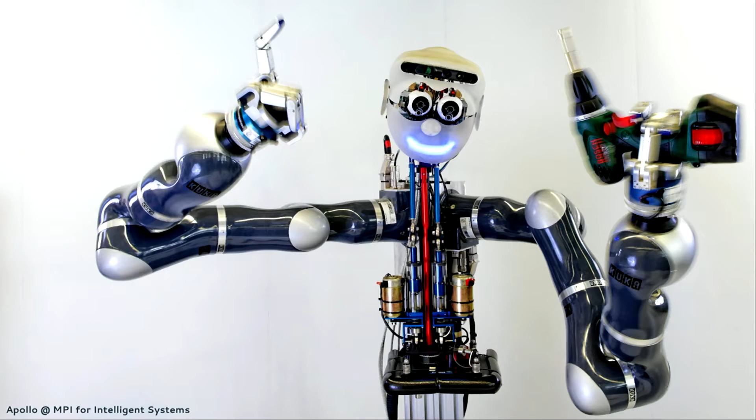And it's really not clear what is in that secret sauce that makes humans so amazing in this. And we really haven't figured out how we will enable robotic manipulation so that robots can be really helpful to people in the future. So I have a few thoughts on maybe how we can achieve this. But today, I want to focus on one particular point, which I already brought up, and that's that we should probably embrace uncertainty. So what do I exactly mean by that?

So one of the places where I typically don't publish is actually in computer vision and machine learning conferences, or very seldomly. I have very few papers on this. And I thought a little bit about that. And I think the reason for this is that in these two fields, very often, success is measured in terms of accuracy. So, for example, in computer vision, this can be in terms of pixels, like segmenting or labeling each pixel in the image, or in a point cloud, or maybe predicting forward in machine learning what is going to happen next, to the absolute maximum possible accuracy.

And that, of course, is a very interesting and challenging problem, and it has its own merits, and should be done. But I would also argue that total accuracy is actually maybe never achievable. Also, this total accuracy is not necessarily what a robot actually needs.

And if you think about this picture, for example, where you see a kid playing with toys, you can imagine this kid basically playing around with these objects, maybe dropping them, maybe they're slipping, maybe it's trying to take one of these things and put them into the tractor or whatever, and it's not going to work, and it's just going to recover from these things. So it's really a very intricate process, but it's probably not about maximizing accuracy, but rather about how to recover from failures and how to try again.

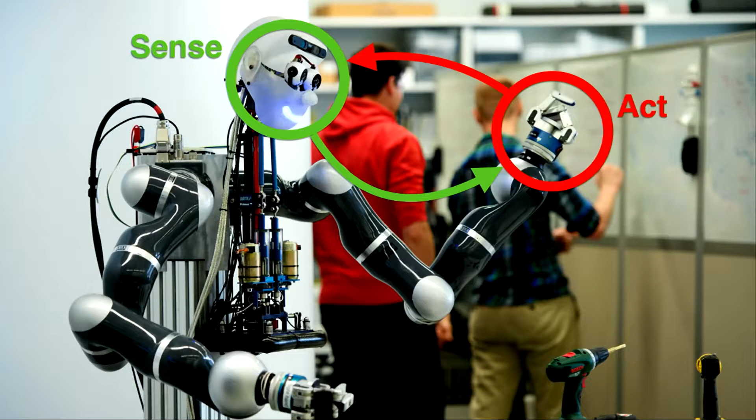So what do we do in robotics, right? I think in robotics what we need to do is to close fast feedback loops around really messy, high-dimensional sensory data, to actually interpret the scene and really make very fast decisions. But I would argue that we need to accept then that we will never achieve total accuracy. And instead, I would argue that let's trade off accuracy with speed and work on methods that are maybe reactive and continuously adapt and can react to failure, instead of trying to plan everything out based on the assumption that you have some perfect perception method or some perfect prediction method.

I do think learning and computer vision and machine learning methods and planning methods should be in there. But I think the focus, the goal should be a bit different. And even if you take that view, there are still challenging questions. So you still have to ask yourself, if I don't need total accuracy, what is actually the important information? And how off can I be to still have a functioning robot?

But just to summarize, one message that I'm trying to convey in this talk is, if you work in robotics, you actually have to say goodbye to perfectionism, as people, for example, in computer vision often strive for, or in terms of prediction. And if you work in robotics, you really have to, I think, accept the fact that everything will be uncertain at a certain base level, and you have to somewhat embrace that chaos of this uncertainty that comes with a robot. Okay, so once you accepted the fact that maybe we will never reduce uncertainty, then I think one good focus is actually on controllers and planners that can continuously adapt.

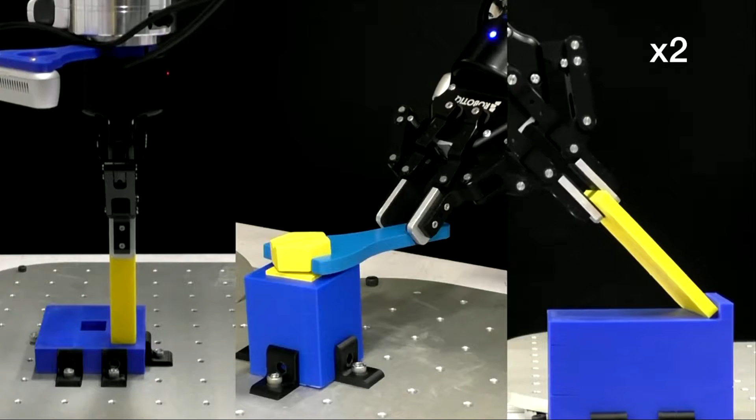For those of you who work with a robot, all of you know that actually autonomously learning robot skills is pretty challenging. So here you have these 3 tasks of peg insertion, turning a wrench, or a shallow depth insertion. So for example, something that people who assemble your phone, or you sometimes when you put the battery into your phone, have to do. So these are pretty difficult tasks.

And the way we want to approach this problem is, instead of trying to develop better perception methods or better controllers, what we're going to try here is to actually scaffold the learning process that this robot has to go through. And the contribution here is that we formulate scaffolding as a 2-loop learning problem. Let me go through that part. So actually, scaffolding is a concept from developmental learning, I believe. I don't know so much about this. I just know it's a concept there.

But you can also think about all the things out there that we as people actually use to help in learning things or building things. So, for example, we use scaffolds to build buildings. To learn certain skills, for example, riding a bike, you can use training wheels. And actually in automation and assembly, fixtures are a very common thing that you use to make assembly easier. But of course, all of these things, like how you place these fixtures, are typically figured out by some smart engineers, right? And a trial and error period.

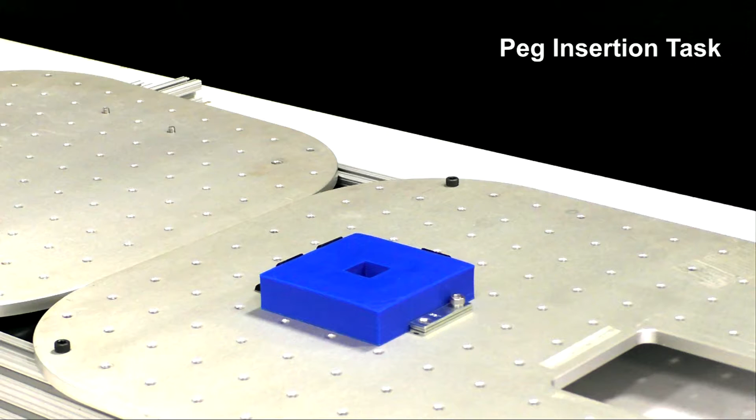So our goal here was really to construct a framework for robots to autonomously discover how to ease manipulation skill learning. And so let's take this peg insertion task as an example, right? It's a difficult problem, especially if you don't know what exactly the geometry is and if you have noisy perception, to smoothly and efficiently insert this peg.

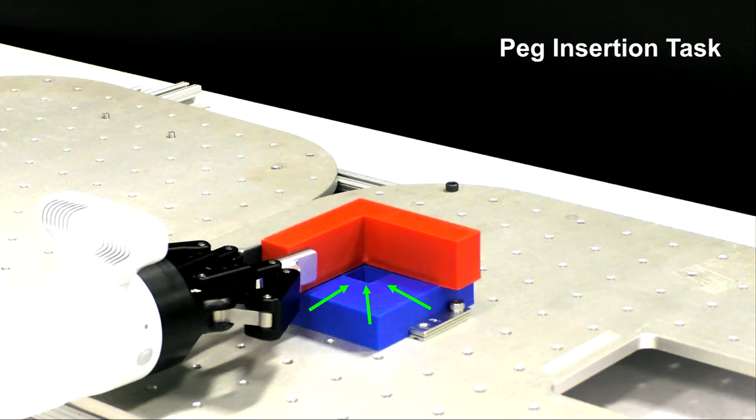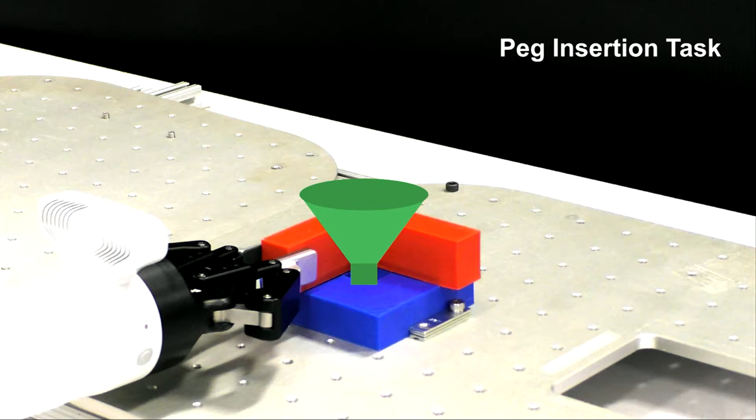But if you put a fixture at the right place that aligns just the right way with these corners of this hole, then suddenly the task actually becomes quite easy because that particular fixture funnels the uncertainty into that place, right? So basically, the fixture blocks and prevents a lot of these false motions that a robot can go through. And therefore, this is how this funnel works, by restricting this motion.

Going back to your concept of training wheels, the purpose of the training wheels is to enable you to be able to ride the bike without the training wheels. Yes, I come to that later. Okay. How we get rid of the fixtures again. Okay. And I guess the other point being that, like, peg and hole insertion, the idea of chamfers in peg and hole insertion sort of came about to be able to create pre-images that are attractive.

Yes. So we can come to that, but I guess my question would be, I'd love to understand, and you promised that you'll talk about it, how the training wheels can be removed. Yes, so that I would definitely address. And also the chamfers, yes, so people came up with the idea that this makes this easier, right? And it also funnels uncertainty.

And by having actually this automatic process, you can actually optimize this online where it's maybe not so obvious how to place them. I mean, we selected pretty obvious problems here, right? But you could see how this could potentially be used for not so obvious problems. And I will show actually how you can remove them again and what happens then.

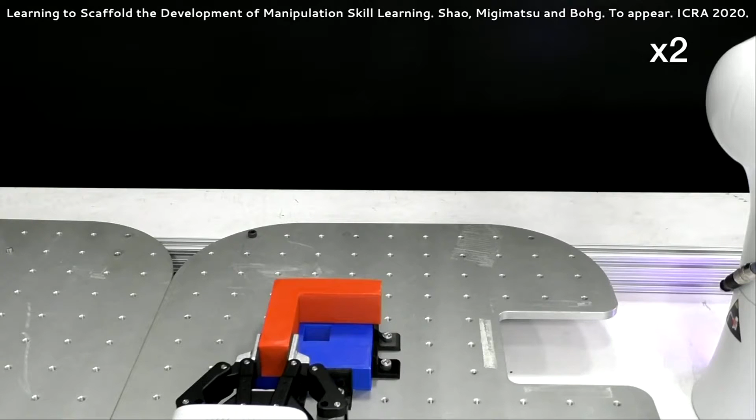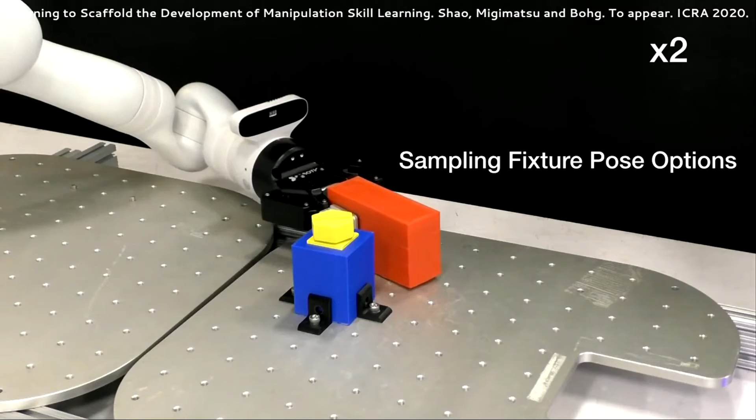Actually, let me show you this video, okay? So this is why we need the robot, because we can just let it run, but really you could just have a person here, right, or some other way. It's just cute to have a robot help the other robot. So you're just showing what it was hallucinating. Yeah, so this was actually doing the CEM. So literally it had the Q map basically learned, and then now it's sampling it, fitting the Gaussian, sampling it again. And this is for the 3 tasks that you're seeing right now, right?

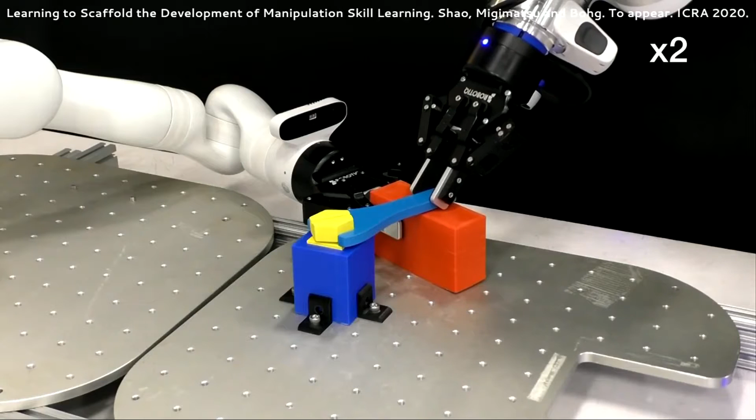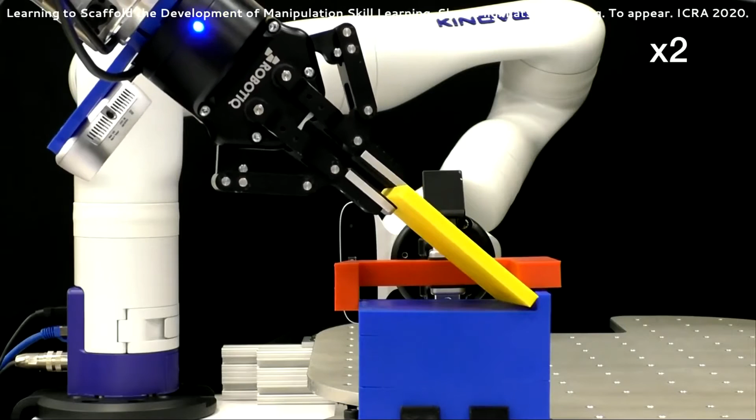So this task is also easier because now you can't have the wrong orientation, right? And here this is a bit more complex of a manipulation task because there are 2 steps, rotating it and then kind of sliding out. So also in this case, the battery can't move up here. Right, but sorry, your question was if it was stiffly controlled, right? Yeah, it definitely has pretty stiff gains to not give.

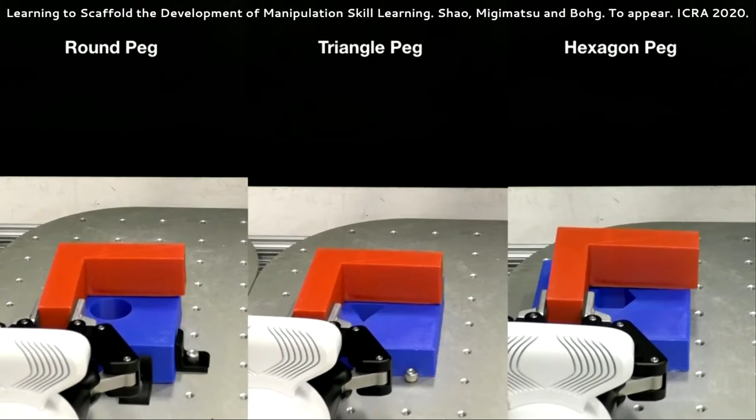Okay, so one thing I wanted to also show is that it can actually generalize over peg geometry. So again, we have trained this policy on the square peg, and now we just reuse exactly the same one for these other peg geometries. And because it's kind of a similar structure of the problem, it will actually work. Also, this was only trained in simulation, by the way, and we just replay it, which was kind of surprising to us that it worked so well.

Small question. Did you constrain how long you would run the inner loop RL? Yes, there was a maximum time. That would be smaller than in your plot where you show the performance and learning curves, where RL was trained probably much longer and learned much slower. Sorry, I didn't quite understand the question. Can you repeat it? So it appears that there were many times the outer loop would be called and then invoke the inner loop RL. I'm just wondering how long each inner loop RL would take? Because if your peg placement was just unlucky and it prevents the task from completing, then it would take a long time.

And then there is a maximum time we run it, and then basically the reward is the success rate of this policy at that stopping time, so that it doesn't run forever, right? And then during training we sample a new arm, basically, in this bandit approach. So the hope is that if the placement is good, then within this limited time you would already be able to solve the task. Yes, exactly.

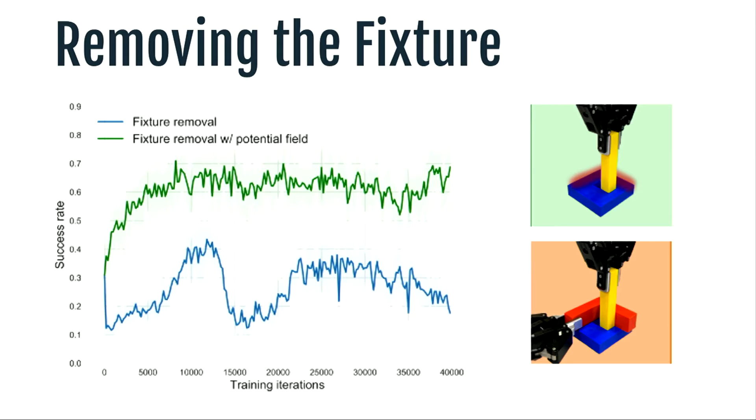I'm sorry. Sid, we should also talk about that new Kinova, which I'm really disappointed by. I take all the blame for it. No, you shouldn't. We can just commiserate maybe. Anyway, I don't want to blame anyone except for maybe Kinova.

Okay. All right, so I had a summary. Let's move on to the other two projects. We talked about this one, which was learning how to scaffold. Now let's talk about a different problem where we want to do task and motion planning, and the scene is actually changing. And you want to always execute it in the real world with lots of noise and uncertainty.

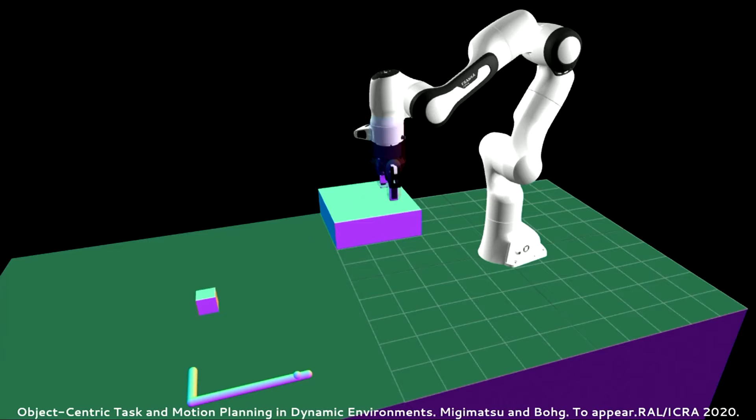So let's look at this. This is an example that turned up in Marc Toussaint's work from RSS 2018. You have this robot. It wants to place the small box on the large box, but the problem is that the small box is outside of the workspace. So it can figure out by combining symbolic and geometric reasoning that it can use this hook to get the little box closer and then reach for the box and place it on this shelf.

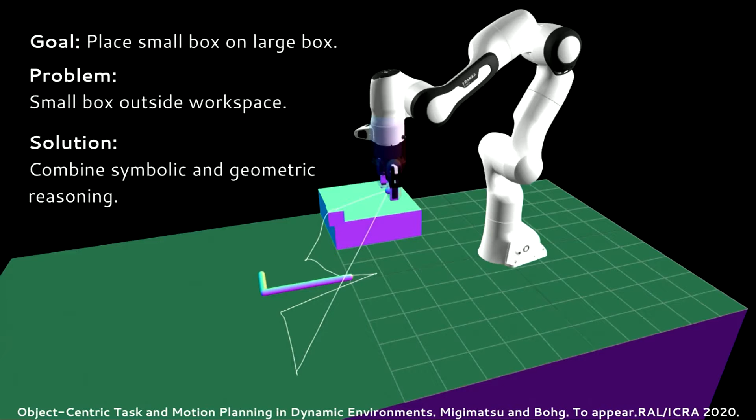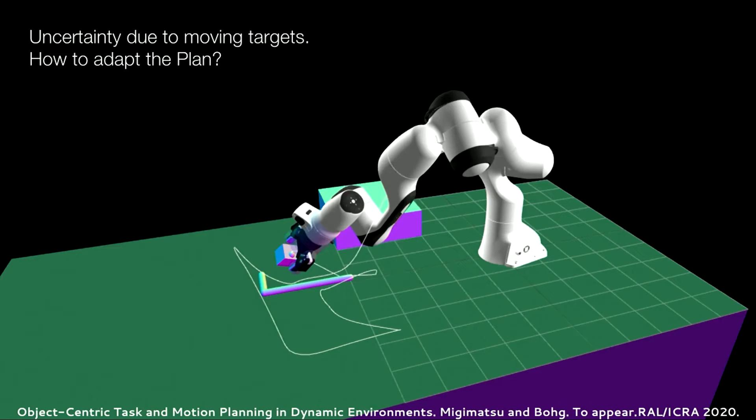But now, what happens if you have moving targets? Here, Toki is moving these things around, moving the little box around. And of course, we still don't want the robot to throw its hands up and give up. It should be able to adapt and still execute that particular plan. So that's the problem we want to solve.

We adapt this approach from Marc Toussaint's work from RSS 2018. That is logic geometric programming, and we reformulate it to be able to do what I just showed you. So I just want to quickly go through this optimization problem, which basically combines a logic planner with a motion optimizer.

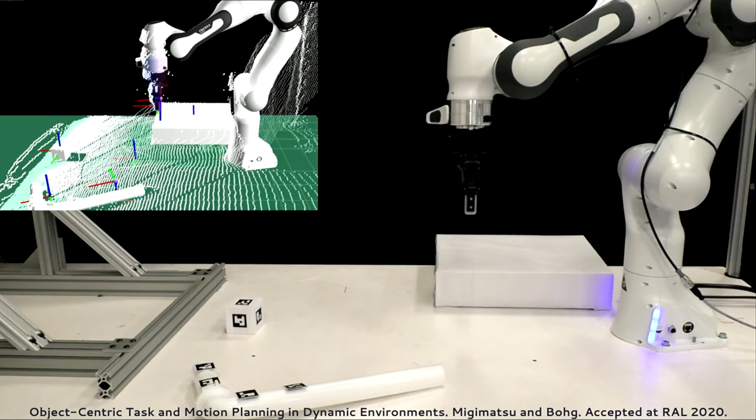And of course, we also wanted to see how this actually works in the real world. So we basically integrated this entire system on a real robot with a model-based tracker. And we had to actually combine it with markers in order to make it robust. So both of them were necessary. So there's some work to be done there. But essentially, we can show here that even if we perturb the objects and everything, this plan still works out.

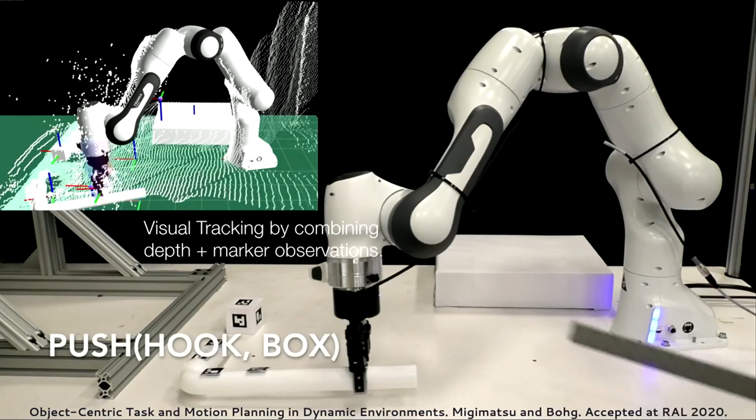All right. Just to summarize this particular approach. What we wanted to achieve is to have a task and motion planner that actually has a valid plan even if the object or the environment changes. And the main idea was to optimize relative Cartesian frames. And the algorithmic contribution here was to essentially reformulate this trajectory optimization problem in terms of these frames. And therefore, we achieved task and motion planning in dynamic environments.

And I think I'm actually out of time. So I don't think I'm going to talk in detail about this particular project on manipulating deformable objects. I'm just going to really briefly talk about this. Essentially, what we wanted to achieve is a robot that can bring an object like this, that has a very high-dimensional state space, into a goal image. And we wanted this system to be robust to occlusion.

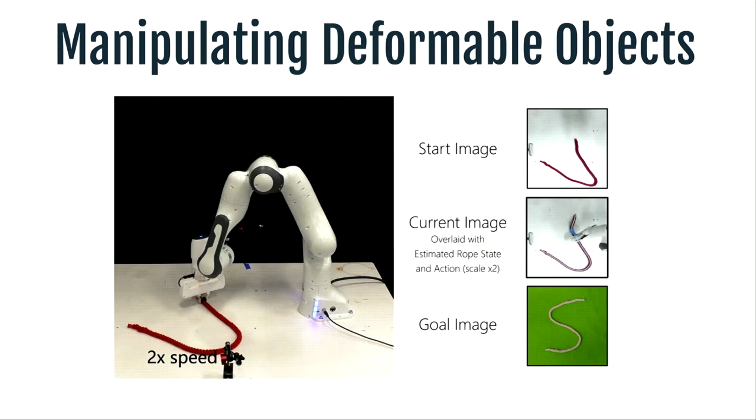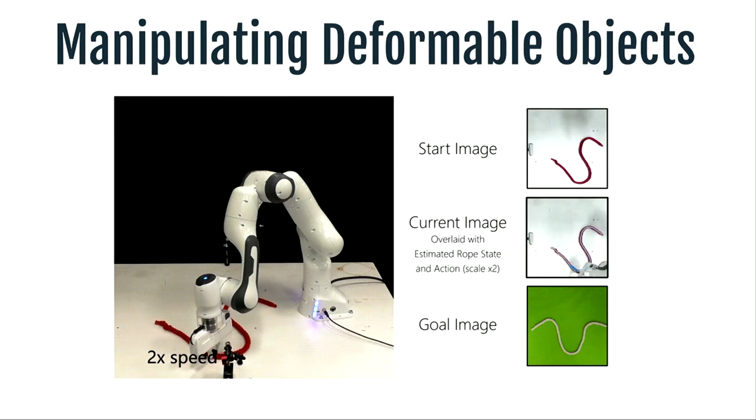So you see the robot is actually occluding the object. And this goal image isn't even of the same appearance as the object that is being manipulated here. And we have all these annoying sources of uncertainty, and we want to be able to solve it with our system. There's lots of annoying dynamics that are difficult to model. So we essentially had an approach using receding horizon control. Basically, we used MPPI for planning out how to do this manipulation.

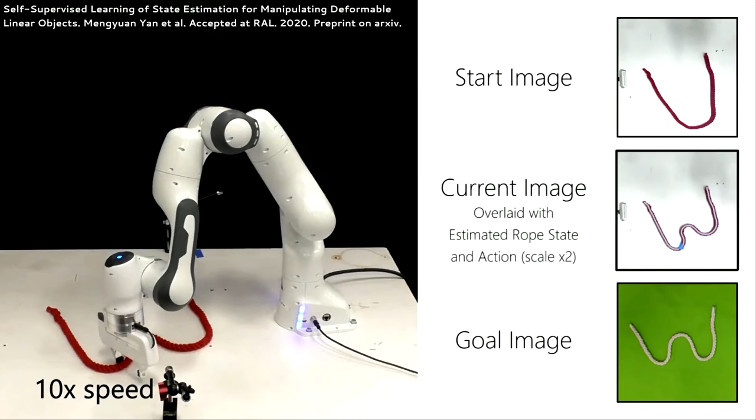And the main contribution here was really the perception model, which means you basically have to perceive a 64-dimensional state. And it's pretty amazing because it can solve all of these difficult situations, and it can even deal with intersections. If you are interested in how this actually works, you can look at this paper. Under the hood, we represent this linear deformable object in state space, and we propose a differentiable renderer that allows us to do self-supervised learning and robust state estimation. And then we have an entire system that can do this manipulation part.

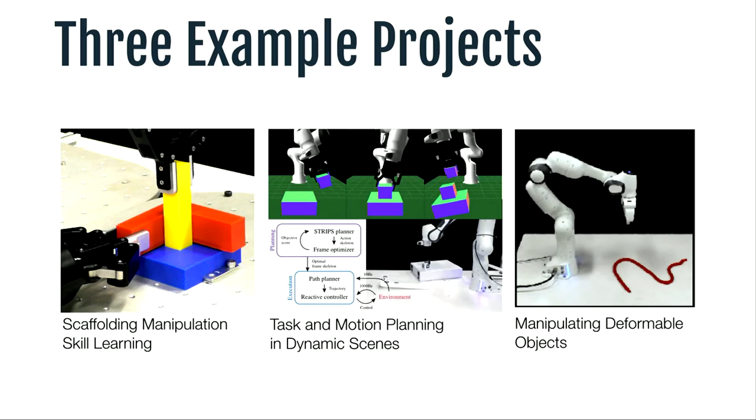OK, so with this, I just want to close. I showed you at least 2 of these projects in detail and just kind of wishy-washied over this one. In these 3 projects, I really tried to impress on you that maybe instead of dealing with much better perception methods or much better prediction methods, maybe we just have to accept that these will never be perfect and then shift the focus towards other solutions on how to deal with the uncertainty that is always going to be there in the system.